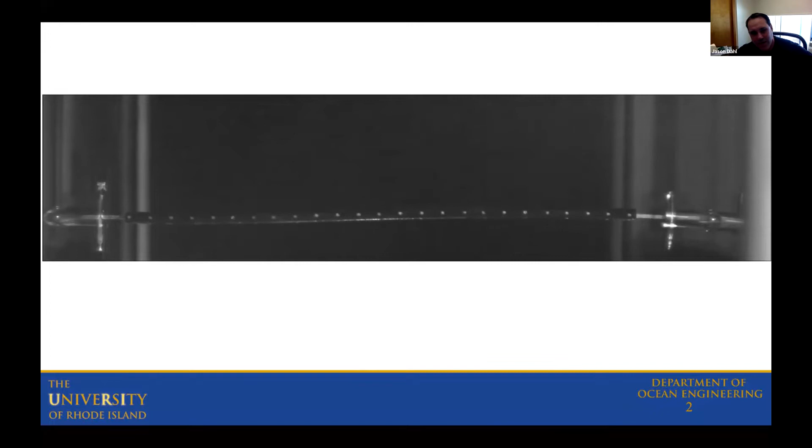All right, I'm assuming that the group here working in renewable energy systems or energy systems in general may or may not be familiar with the topic of vortex-induced vibrations. It's not necessarily specific to renewable energy systems, but it is related in some way, and it's important to structures that operate in the ocean. So just to give you an idea of what vortex-induced vibrations are: if you have fluid flowing across a bluff-shaped body that's flexible in nature, the vortex shedding behind that body can cause it to vibrate. This is an example of a flexible cylinder encountering a fluid flow. The fluid flow is flowing out of the screen towards your face, which is causing this cylinder to vibrate due to that fluid structure interaction.

Now this is an issue in a lot of ocean systems. In offshore structures, such as the spar buoy platform over on the right here, this thing itself is a large cylinder that floats in the ocean. So if it encounters currents, the whole structure itself may vibrate due to the presence of those currents. It also has mooring lines, which can strum due to the presence of those currents. It also has drilling risers, which can vibrate due to currents, causing problems with the operation of offshore structures like this.

It's also an issue for energy systems in the ocean. Floating offshore wind has mooring systems, has cylindrical shapes if they're floating structures, so a spar-type floating offshore wind system may be susceptible to these types of vibrations. Electrical cables, underwater electrical cables, could encounter these types of things. Towed systems, also towed arrays, can also undergo strumming that can cause a problem with imaging underwater. And then in the upper left here, this is actually a picture of a device called Vivace, developed at the University of Michigan, which tries to utilize the vibrations caused by vortex-induced vibrations for energy harvesting purposes. They have an array of 4 cylinders here that vibrate when this device is placed in a current.

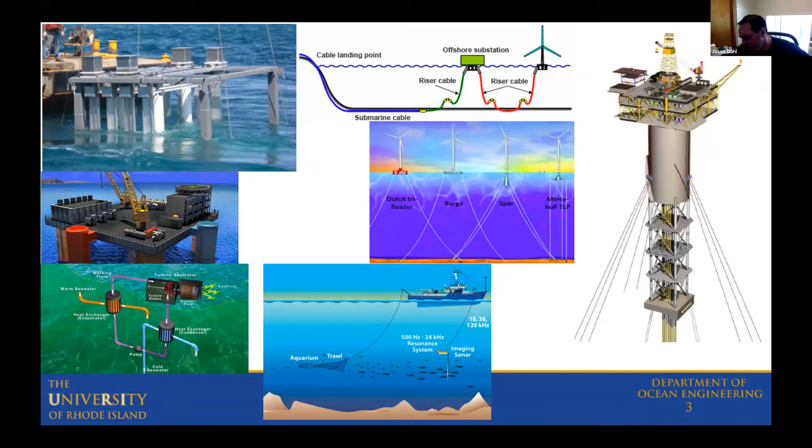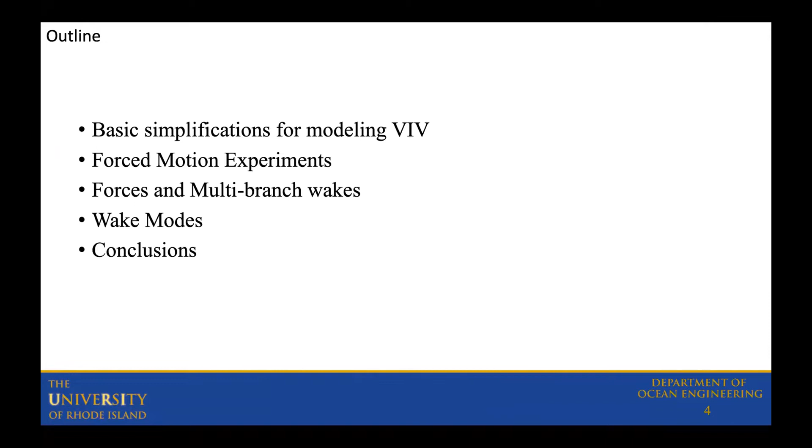So today, although there's a variety of these applications relevant to this topic, I'm going to talk about things at a much more fundamental level and not so much in terms of the applications. Just to give an outline of what I want to talk about: I'm going to talk about some basic simplifications for modeling vortex-induced vibrations, how we simplify these more complex applied problems into something more canonical. I'll talk about forced motions experiments, which is one way we use for understanding the forces that act on the structure under these types of flow conditions. And then some of the observations from these forced motions experiments, which include looking at the forces, which can involve some very nonlinear behaviors, such as multiple branches or multiple wakes for a given set of kinematic conditions, and looking at wake modes.

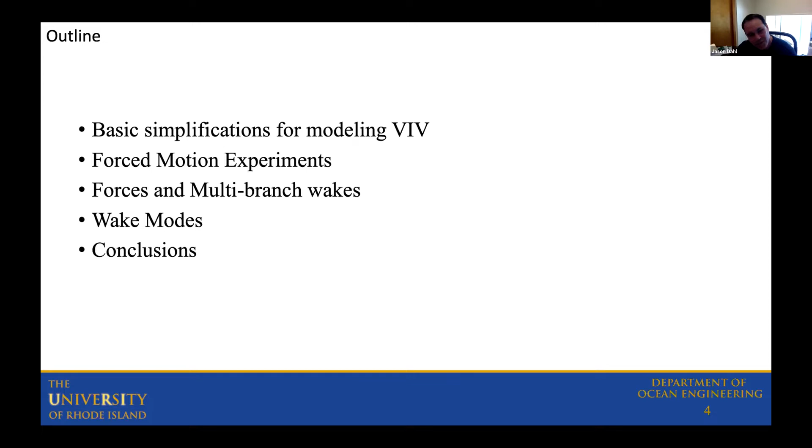So looking at some flow visualization of what's actually happening in the fluid when these structures vibrate.

To give a basic understanding of this problem, if we've got some floating structure here, which might be this green box, and then some long flexible structure stretching to the bottom, this could be a drilling riser, a mooring line, or whatever.

These types of structures in the ocean might encounter a sheared current, which could be a uniform current or a current that changes with depth. But locally, what's happening is if we look at a cross section of this structure, we can think of it as though we've got some cylinder here.

That cylinder is flexible in some way. If we're just looking at a cross section of the structure, we might think of it as just a cylinder with a spring attached, or a spring-damper combination. As fluid flows across that cylinder, we get vortices that shed in the wake of the structure, and the phasing, proximity, and strength of those vortices can force this structure to move side to side, which causes it to vibrate.

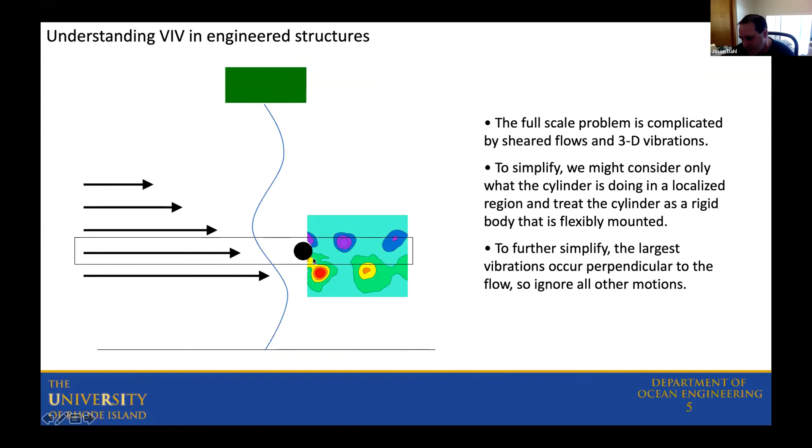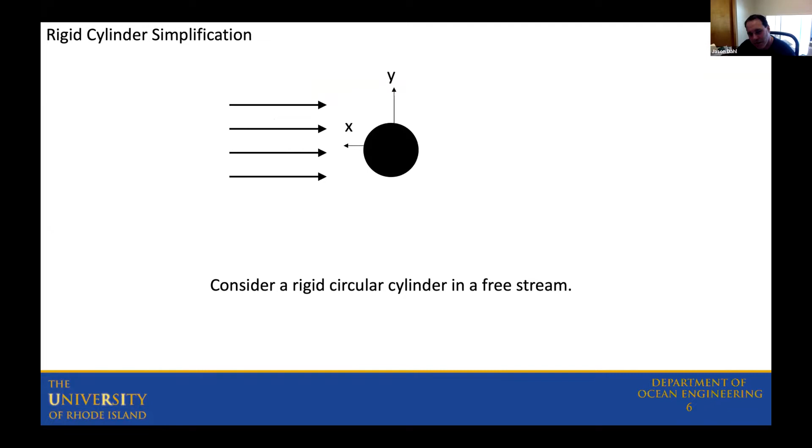Now, if we want to think about the simplified problem, we consider just a uniform incoming current flowing across the cylinder. As the fluid flows across it, you get these vortices shedding in the wake. The proximity and motion of those vortices to the cylinder cause a force to act on it. One way to think of this is that these vortices are little low pressure regions in the wake of the body, so the body gets pulled towards them.

Now, when you have vortices shed in the wake of this cylinder, the typical shedding pattern may be to have one shedding to one side and an opposite rotating vortex shedding to the other side. As this happens, the vortex on top will pull the cylinder upward, and the vortex on the bottom will force it downward. So you get a frequency associated with the forcing of shedding.

The frequency acting in the y direction occurs at the same frequency at which a single vortex sheds. But if you think about the drag direction, the force acting in the x direction, it happens at twice that frequency, because the vortices are always shedding downstream to the same side of the cylinder. So you typically end up with a 2-to-1 frequency ratio in this type of vortex shedding.

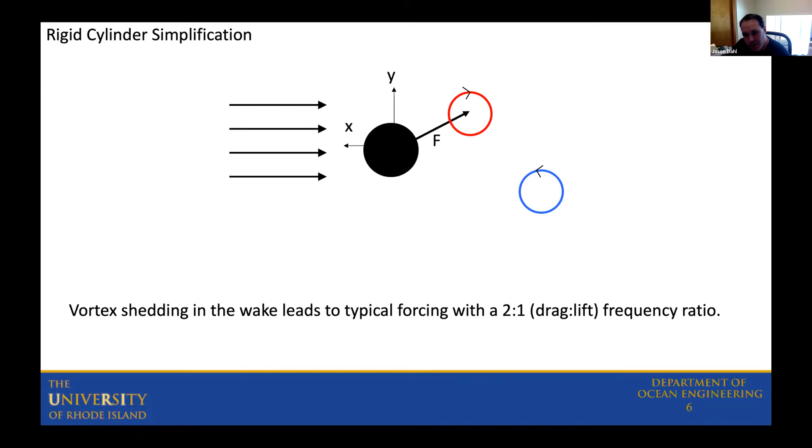That becomes important when we start looking at what can happen on these types of structures in more complex situations. And then when we consider what's happening with this structure, we need it to be flexibly mounted in order for it to move.

If we just consider this 2D structure mounted on springs, the simplest case we might consider is that the structure is only allowed to move in the y direction. That's an assumption commonly made in offshore structures, and the reason is that most of the vibrations observed for these types of structures occur in the y direction, called the cross flow direction, or perpendicular to the flow. Vibrations in the x direction end up being much smaller.

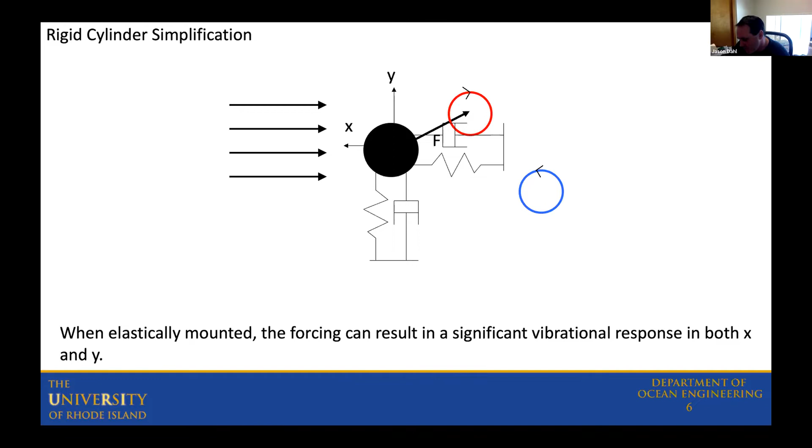But that type of simplification can cause a problem. Let's first look at the simplest condition though. If we consider only motion of our structure in the y direction, one common assumption is to assume only sinusoidal motions and forces. Now this is a big assumption, and it's not actually true. If you observe the vibrations of a structure undergoing this type of excitation, it doesn't just vibrate with sinusoidal type motions, and it certainly doesn't just have sinusoidal forces. But this is a simplification made to help understand the problem a little more.

So if we do that, we can define an equation of motion. For our simplified case, it looks like a simple spring mass dashpot system with a mass in the y direction, a damping in the y direction, and a spring constant for the y direction. The fluid force is all on the right-hand side of the equation, representing the forcing caused by the presence and shedding of those vortices.

If we assume sinusoidal motion, we can assume a form of the response. So the response has some amplitude and frequency. We can derive the derivatives then from that response.

If we also assume that the forcing is a sinusoidal response, we said that this is not entirely true. This is actually like a first order approximation of the force, if we treated the force as though it were a Fourier series. Then we can say that the force is of the form of some magnitude occurring at the same frequency with some phase shift.

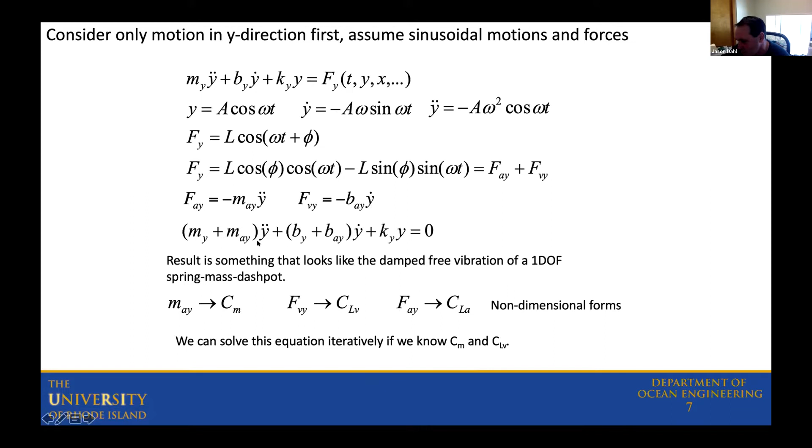So how do we determine those? Well, there's a variety of ways that people approach for determining these.

You might use a fluid model similar looking to the Morison equation, for example. There's a lot of work that's been done on what are called wake oscillators for trying to model this. But those approaches are somewhat flawed in the fact that they don't perfectly capture what's happening in the fluid when it's responding to what the structural system is doing.

So one approach to solving or representing the fluid force is to conduct forced motion experiments. In this case, what we do is we take our cylinder and we force it with a prescribed motion, such as a sinusoidal motion, y equals a cosine omega t. Then we say that the output force, again, we'll assume that it's of the form of some sinusoid with the same frequency and a phase shift.

So then if we go through prescribing a bunch of motions, doing a number of experiments where we force this cylinder to oscillate with a varying amplitude or varying frequency, then we can come up with basically a database or a lookup table of forces that we can use as an input to solving our equation of motion.

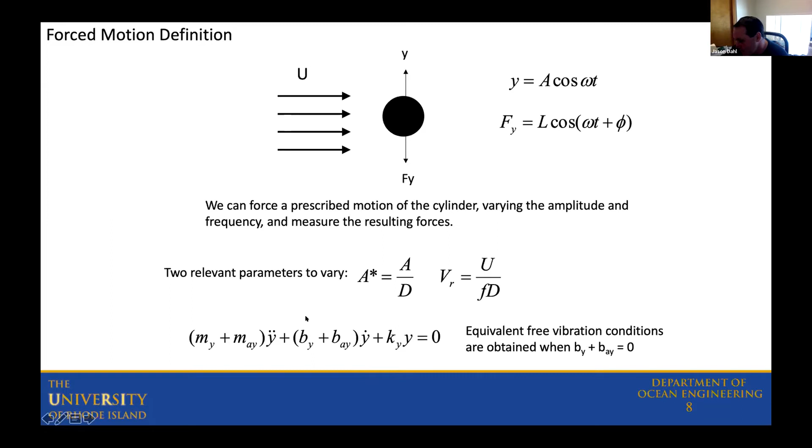Basically you can think of this as a system that's going to oscillate at its effective natural frequency. In this case, the effective natural frequency would just be the square root of ky over m plus ma. It's not really a free vibration, it's actually a forced vibration system because it's being excited by the fluid, but it behaves like a freely vibrating system with a natural frequency.

Now, in the forced motion work, there's been a number of studies done to develop fluid force models for these types of systems. One of the most expansive databases was done by Morse and Williamson, reported in a Journal of Fluid Mechanics paper from 2009, where they did cross-flow only motion experiments where they varied the non-dimensional amplitude and the non-dimensional frequency.

Non-dimensional frequency is represented by this term VR, which is called the reduced velocity. They did a very fine experimental resolution set, so they took these parameters and varied them by very small amounts. They ended up doing a total of 5,680 experiments.

They conducted these experiments by taking their cylinder and putting it in a recirculating flow channel, then they would oscillate the cylinder with these different amplitudes and frequencies, run an experiment for maybe a minute or so, collect data, then vary the parameter and do that again. It took a long time to run this many experiments, but they ended up with a really fine mapping of how these fluid forces change as a function of these parameters.

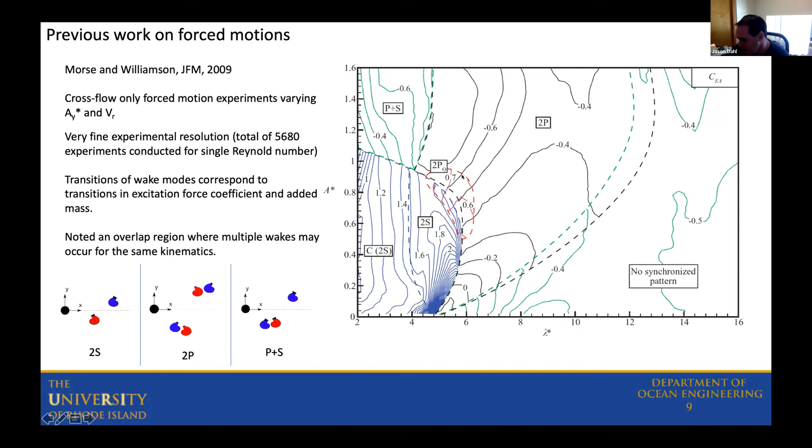Now, one of the problems with making these simplifications of only looking at cross-flow motion is that on real structures, they move with three-dimensional vibrations. They move all over the place.

If you want to look at a cross-section of one of these structures, it's really more accurate to consider that the cross-section can move in both the X and Y direction, which is how I introduced the problem originally. When that happens, if we look at what the structure is doing in that cross-sectional plane, you can get all of these interesting types of motions because of that 2-to-1 ratio between inline and cross-flow forcing that we said is a natural aspect of vortex shedding.

You end up with the structure being excited with these figure-8 type motions. And when you have these figure-8 type motions, it changes the relative motion of the body relative to those vortices being shed in the wake, which then affects how the forces act on the structure. It completely changes the forcing on the structure.

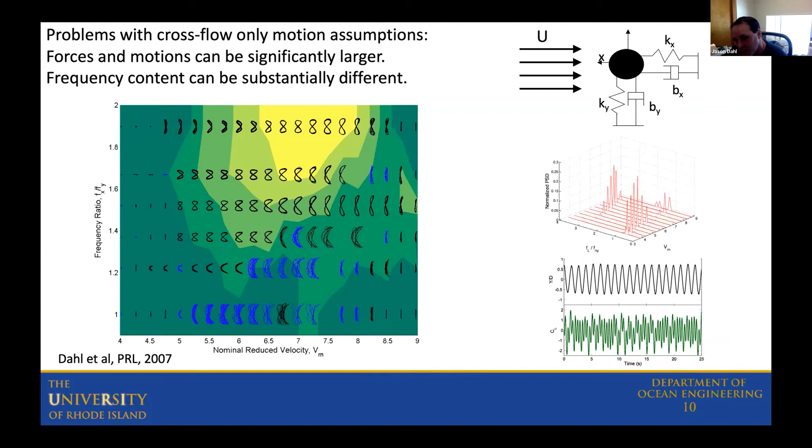This is actually important because higher frequency forcing can really affect fatigue life of things that are undergoing these types of vibrations. So if it's important to consider that our structure can move with both cross flow and inline motion, then we have a different set of equations.

So then we might introduce a second equation to describe motion in the x direction. In our simplified system of just a cylinder with spring masses, our equations might look something like this, where again, Fy and Fx are now the oscillatory or fluctuating fluid forces in both the x and y directions. Again, if we want to solve this system of equations and predict how a structure might move under certain incoming flow conditions, what we need is some sort of model to determine what these fluid forces are.

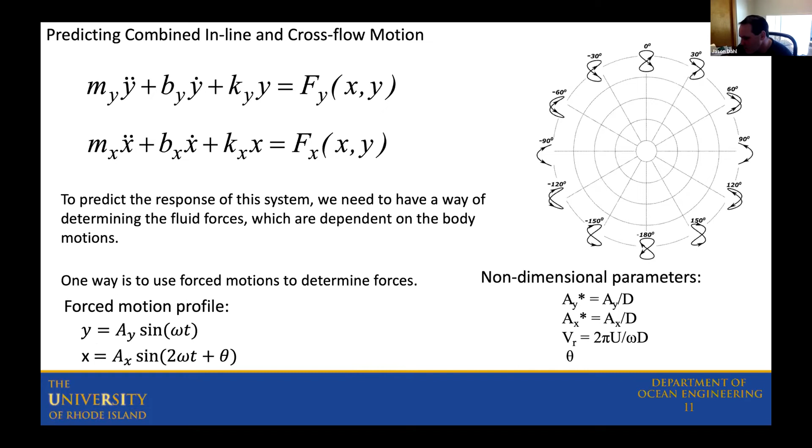All right, so if we want to run a set of forced motion experiments, we need to vary all of these parameters.

One problem is that in comparison with, for instance, Morse and Williamson, which we showed earlier, they were only forcing the body to move perpendicular to the flow direction, so they only had 2 parameters. They ran thousands of runs over these 2 parameters, which gave them a really high resolution of experiments.

If I want to achieve the same resolution of experiments, take the square root of 5,680, that gives you a rough parameter resolution of about 75. If I want the same resolution but now I have 4 parameters that I'm varying, that means I need to run about 32 million experiments, which is not going to happen. So we definitely cannot run that. It would take years and years to do something like that.

There have been other, less resolved forced motion studies. For instance, Gopalkrishnan in 1994 did a set of about 300 runs. But still, even in that case, the equivalent number of runs I would have to do if I increase my parameters to 4 is over 90,000 runs. So it becomes difficult to get a really high resolution measurement of the force in this way.

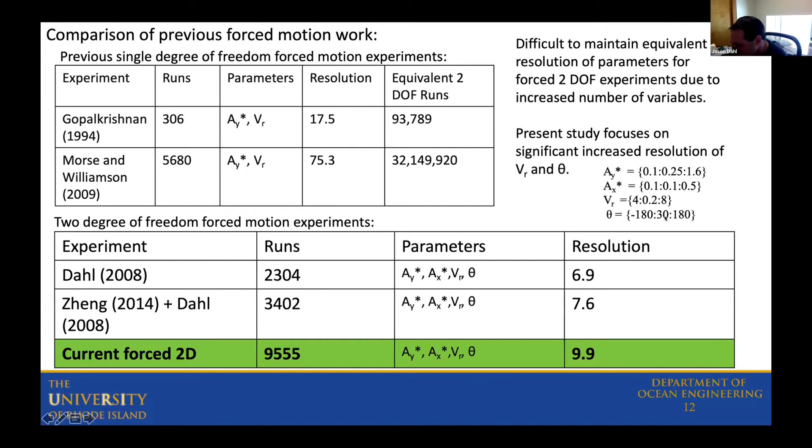The way we conduct these experiments, we have a small towing tank that has a carriage. It's a completely motorized robotic system. Our carriage is mounted to a motor that drives the carriage forward with some speed u. On the carriage, we have an XY motion system that can force the test cylinder to move with prescribed motions in the X and Y directions. As we tow the cylinder down the length of the tank, we force it to move with this oscillatory motion in both X and Y. We have the cylinder mounted to a 6-axis force sensor, so we measure forces as we do this.

We also do flow visualization. For a subset, about 1,000 of the 10,000 experiments that we run, we do flow visualization using a particle image velocimetry system to measure what the fluid is doing, to make a quantitative measurement of the fluid velocity field. For those not familiar with particle image velocimetry, it works by shining a laser sheet through the fluid, and we seed the fluid with particles. The laser sheet illuminates those particles, and we take pictures of them over time with a camera, which allows us to calculate what the velocity field looks like.

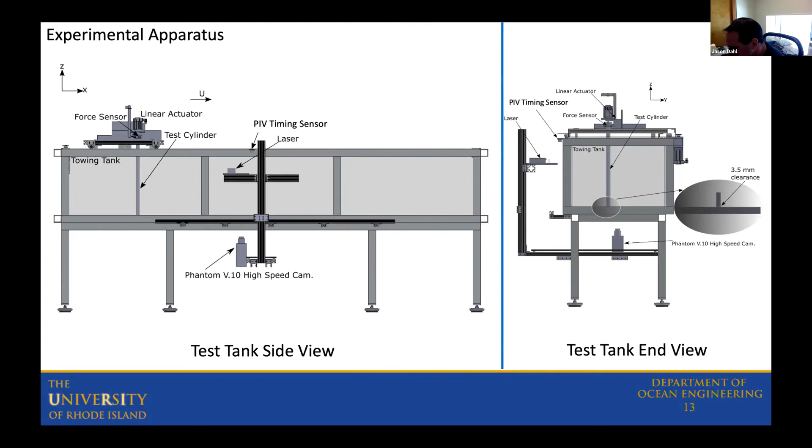It can be a little confusing to present this data, because we're varying 4 variables, and we also want to plot whatever our output measurement is. To do this, I'll show a number of these plots using polar plots to help show what's going on. This polar plot shows variation of the phase theta around the polar plot, so that's the angles that are shown here.

Variation of the reduced velocity is shown across the radius of each of these plots. It starts with 4 at the center, moving out to 8. Whatever we're plotting, so if I want to plot a lift coefficient, for example, that's shown as the contours or the colors in the plot.

I can plot a separate polar plot for fixed values of the inline and cross flow amplitudes. So then I have to make multiple of these plots to show how a particular parameter varies throughout the entire database.

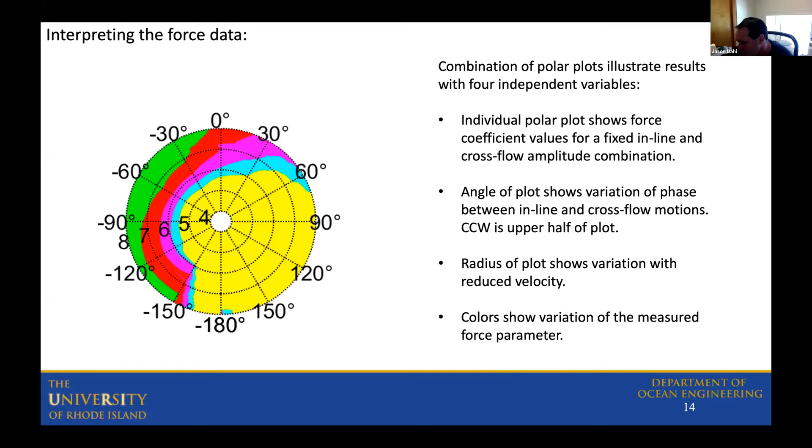For example, if I want to show power coefficient and excitation, the power coefficient is defined up in the top right here. It's basically the inner product of the forces acting on the cylinder in phase with the velocity, normalized by the fluid power.

This is important because it shows where natural excitation of the structure would occur, or where energy transfer from the fluid to the structure, or from the structure to the fluid, would occur. Where this parameter is positive is where there's excitation from the fluid to the structure, which would cause vibrations to happen. Where this parameter is negative is where the structure is forcing the fluid, which would cause damping to the vibration of the structure.

We can illustrate the entire database here and show where it's negative, shown in gray, and where it's positive, shown in white. Every white region here is where we would expect free vibration of a structure to occur, of just a cylinder mounted on springs.

The kinematic conditions for that happening correspond to those shown in the plot here. This matrix of plots shows combinations of Y amplitude on the vertical axis, X amplitude on the horizontal axis, and then the specific values of the reduced velocity and the phase between motions within the polar plot. We can see there's a variety of kinematic conditions where excitation might occur, where this white region is.

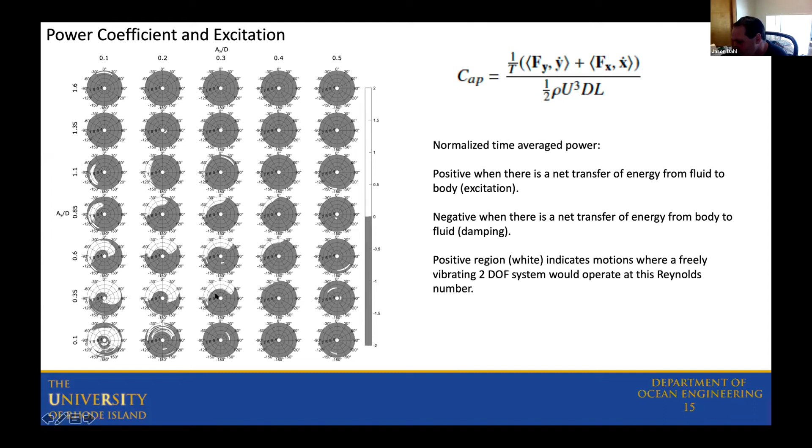Now we can also look at individual fluid forces. It's complicated, and it's not particularly important to look at the specific values, but you can see from these plots there's a pretty wide range to the excitation force CLV, between -5 and 2.5 here. And the force in phase with velocity has a pretty large range as well.

But one thing we did notice when looking at these plots is there's a couple of interesting regions where some weird stuff is happening. If we look at these two particular cases here, for some of the phases there seems to be some jumping around in the fluid force, and it's a little bit hard to see with the full plot here.

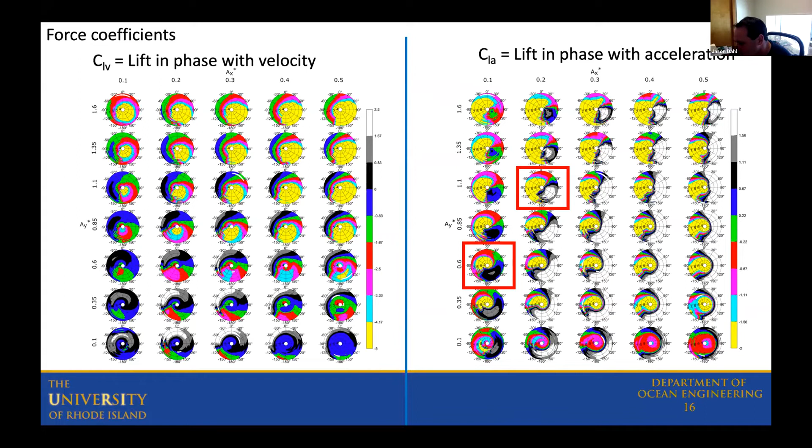So if we zoom in on one of these polar plots, we can see that for a phase near between -120 and -150, there are these kind of spikes in the force here where it's spiking back and forth.

If we take a look at the plot where I plot along the ray of each of these polar plots, we're basically plotting the lift in phase with acceleration as a function of reduced velocity for all different phases. Normally you follow a fairly smooth looking curve where there's a nice transition of this force coefficient as a function of frequency.

However, there's a couple of these phases where we see the force coefficient kind of jump around, and it looks like it's actually jumping between multiple values here. It's interesting what exactly is going on here.

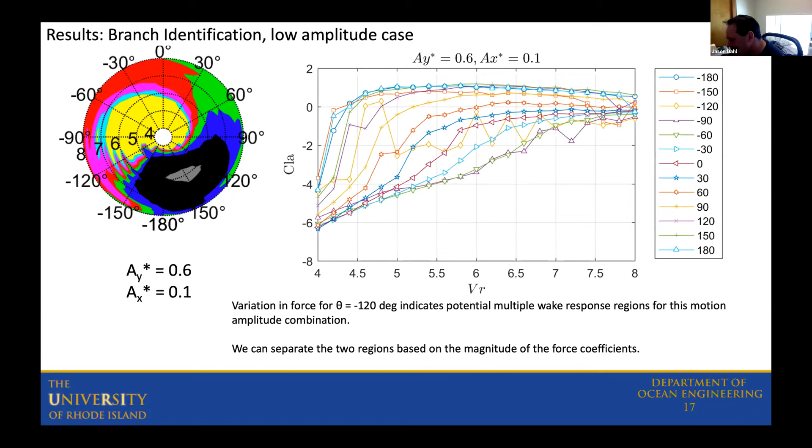If we take a closer look at those values and separate the values occurring over the high measured values from the values occurring over the low values, what's actually happening here is we're observing two separate branches to the fluid force.

If we take another look at this polar plot and separate the upper branch from the lower branch, you can see there's actually an overlapping region where you have a particular fluid force associated with some aspect of the wake of the system. And for the exact same kinematic motions, you can have a different response of the system, or a different wake.

This is exactly the type of thing that was happening in the Morse and Williamson case that I showed earlier. So in order to really see what's happening here, you have to look at the wake itself.

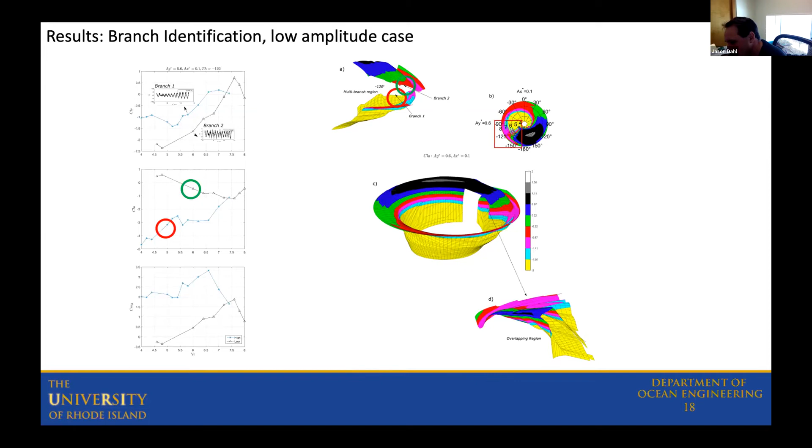We'll take a look at these two particular points along these different branches. If we look at branch 1, the lower branch shown in the polar plot in the lower left here, and look at what's happening in the wake for that kinematic condition, we see multiple vortices shedding in the wake.

You get 2 like-signed vortices that shed together and spin up together in the wake, and then 2 opposite-signed vortices that shed together and spin together. This type of wake is called a 2C wake, standing for 2 co-rotating pairs of vortices. It's actually similar to the 2S wake, where you have 2 single vortices shed, because if these vortices were to coalesce, you'd just have a single blue vortex or a single orange vortex shedding from the body.

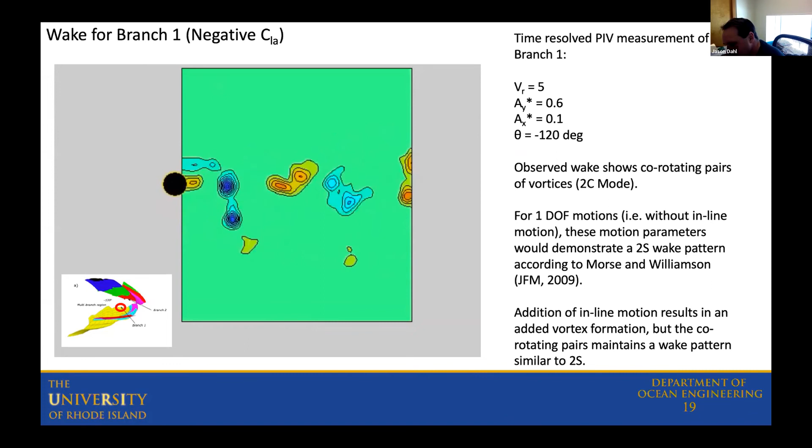This is interesting in itself, but if we look at the other branch, which has very similar, almost exactly the same kinematic conditions to the lower branch, we now have what's called a 2P wake, where pairs of opposite-signed vortices shed per cycle.

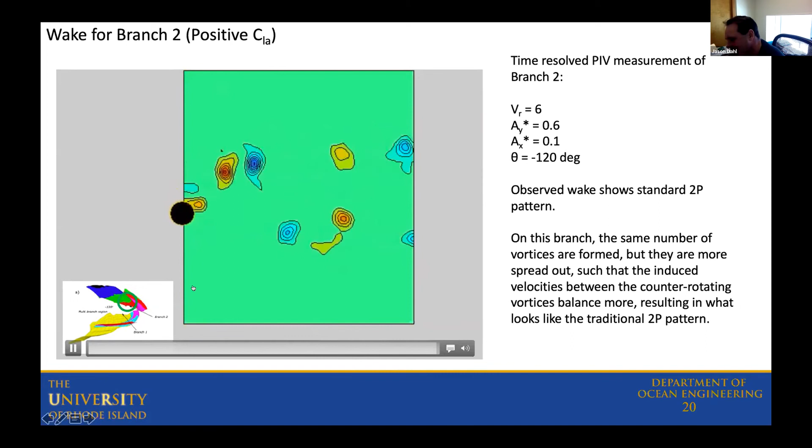It's actually a bit different from the other wake, but if you look closely it's a little related to what we had before, except the like-signed vortices are spread further apart from one another. Because of that, the relative motion of the body with respect to the vortices shedding in the wake is very different, leading to different forcing, different forces, and different phasing between the forces, which is why these responses end up on different branches when viewed in the context of the force acting on the body.

All right. So all of those wakes were for the case of minus 120 degrees here.

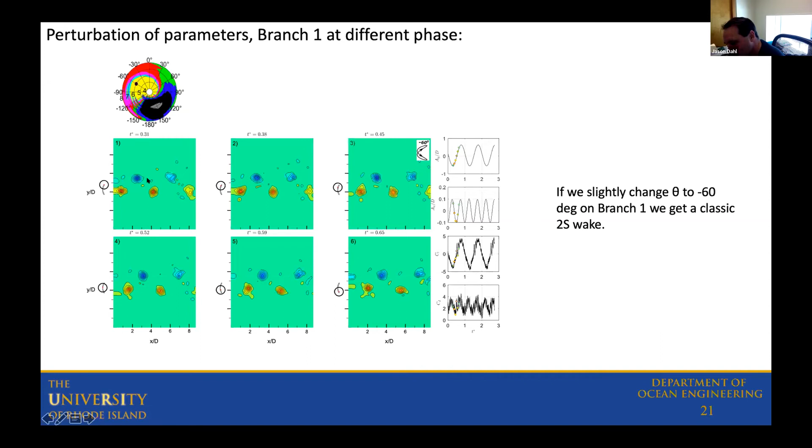If we move along the plot a little, towards minus 60 degrees, we see the wake transitions to what's called a 2S wake, the classic Kármán vortex street, with alternating shedding vortices in the wake. This shows there's a smooth transition of the wake associated with the orbital motion, or orbital shape, of the body as it undergoes these vibrations.

Similarly, if I move the other direction, to minus 180 degrees, keeping all other kinematic parameters the same, you end up with a wake that's verging on a P plus S wake. Here you have 2 blue vortices shedding in the wake of the body, 1 strong orange vortex shedding in the wake, and also a very weak orange vortex structure shedding in the wake.

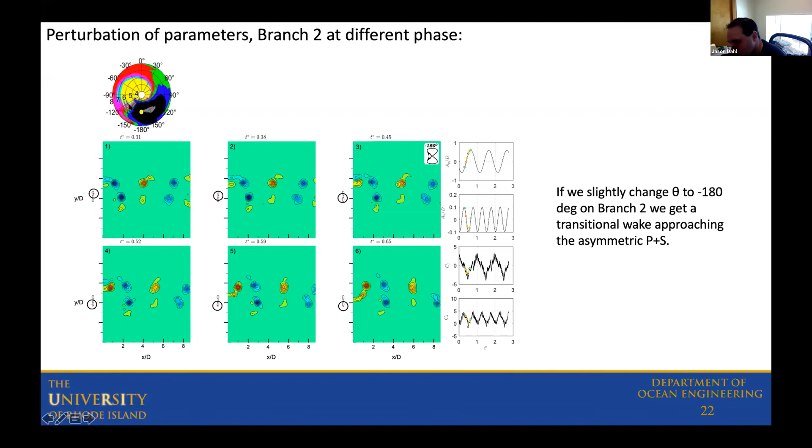This is kind of a transition from what we saw before, which was the 2P pattern where all the vortices were roughly the same magnitude. It's transitioning so that one of these becomes a lot weaker. So again, we see a smooth transition as we move away from that particular kinematic condition.

If we look at the other case, with slightly higher amplitude motions of the body, again we have this multi-branch region we can separate apart. If we plot the polar plot and look at it in 3D, we can again see where these overlapping branches occur.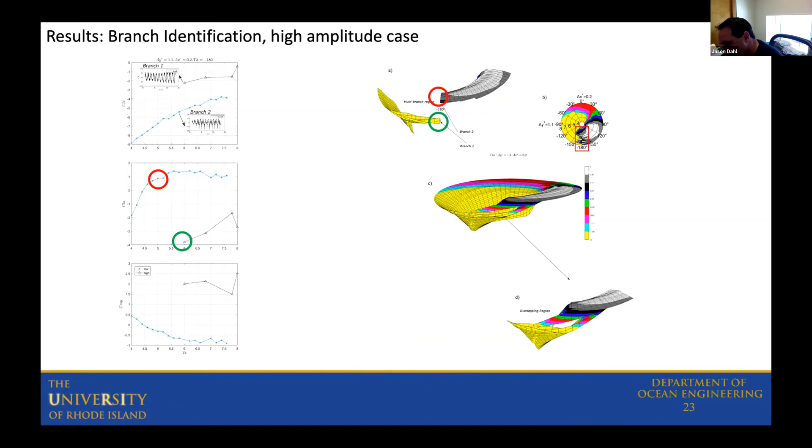If we again look at the wake for these two conditions, on two different branches: on the lower branch, where we have a negative lift in phase with acceleration, we get a really messy looking wake. There's a lot going on here, incredibly messy, not well organized. A lot of vorticity is being shed, and it kind of blobs up and then maybe separates apart.

So you sometimes have pairs almost forming. Because of this messy wake, it causes a lot of asymmetry to the wake, and you end up with a mean lift force acting on the body for motions like this.

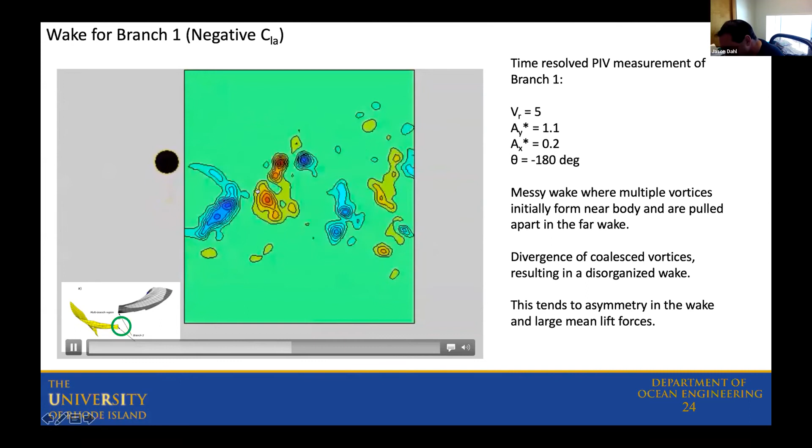If I switch to the upper branch response, we're looking at the same kinematic conditions, but on the upper branch case, we see a more well-formed wake with regular vortical structures forming. It's almost what you'd call a 2T wake, because you end up with a triplet of vortices that shed each time: one weak orange vortex and two strong blues, then two strong orange with one weak blue.

Again, this is interesting where the reformation of the wake results in this change in the phasing of forcing, and this dramatic change in forces acting on the body.

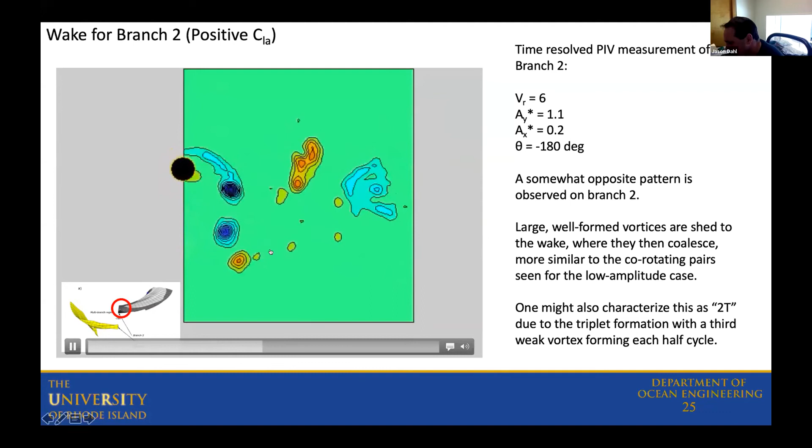All right, and if we go through the entire database and ask where is this happening, all of these shaded regions on this entire map are regions where we observe this to happen.

One thing important to note is we're conducting towing tank experiments here, and it's really hard to observe something like this in a towing tank experiment, because usually there's some sort of bias to your experiment. What that'll do is bias your system to always show you the same response or the same wake, so this is a testament to the nice way this experiment was conducted.

Because we made it completely robotic, we were able to repeat the experiment with the exact same conditions every time. Because there's no preference to the fluid on which of these wakes are going to form, it would naturally just switch between them. So as we conducted a new experiment, it was completely random whether it would show one response or one of the wake branches or one of the others.

Also, because we were running so many experiments, the only ones we repeated were for phases of minus 180 degrees. We actually ran them twice, but none of the other experiments were repeated. But we did find that where these branch responses occurred for minus 180 degrees, such as in this case, we repeatedly produced these results where some of the time we'd observe one type of wake and some of the time a different type of wake.

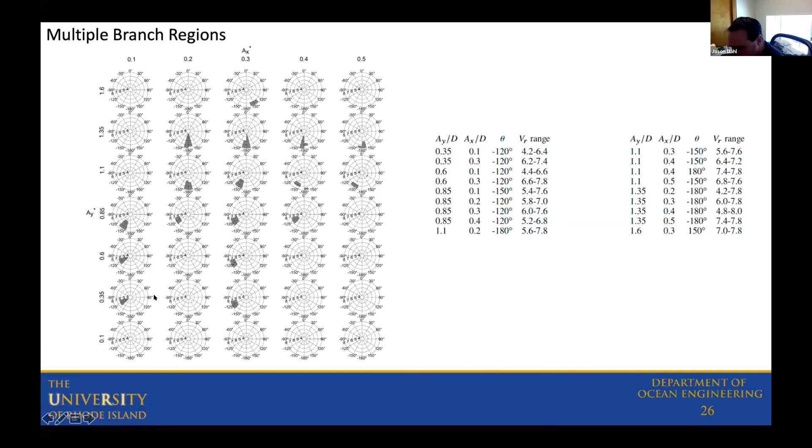So the interesting takeaway here is that this type of very nonlinear response is all over the place when you include this inline motion to the response of the system.

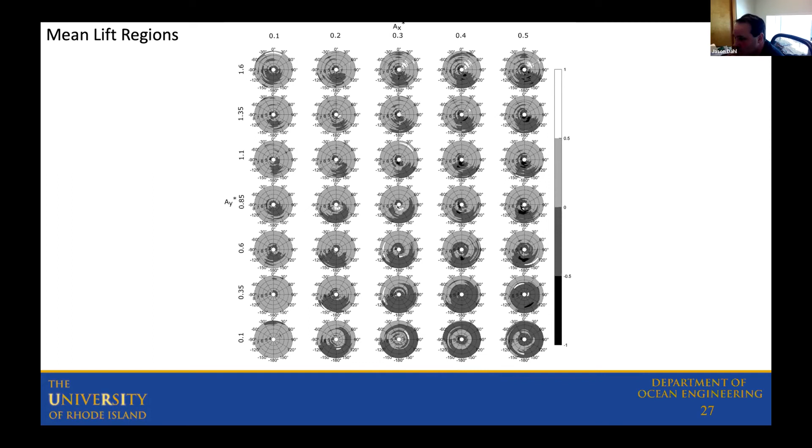Another aspect of this is because of these multiple wakes and messy types of wakes, you can have some pretty strong mean lift regions. Mean lift can cause problems on offshore structures because you can get conditions called kiting, where the structure biases to one side due to the mean lift acting on it. Mean lift can also, since it's a result of asymmetry, cause or result in unstable vibrations such as galloping.

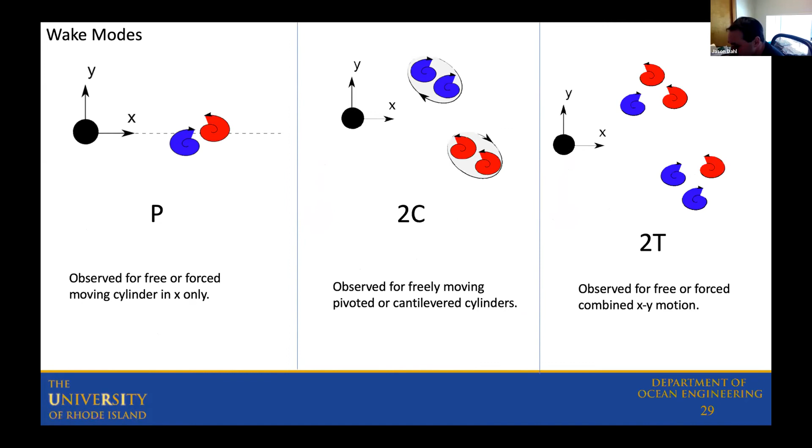The interesting thing we see is if we go through the entire database, we get all of these different modes and more. So it's really complicated, really complex what's going on in the wake of this structure, even with these minor and small variations to the kinematics of the structure. This illustration maps out how there's so much variability in what's happening in the wake with these different types of wake modes occurring.

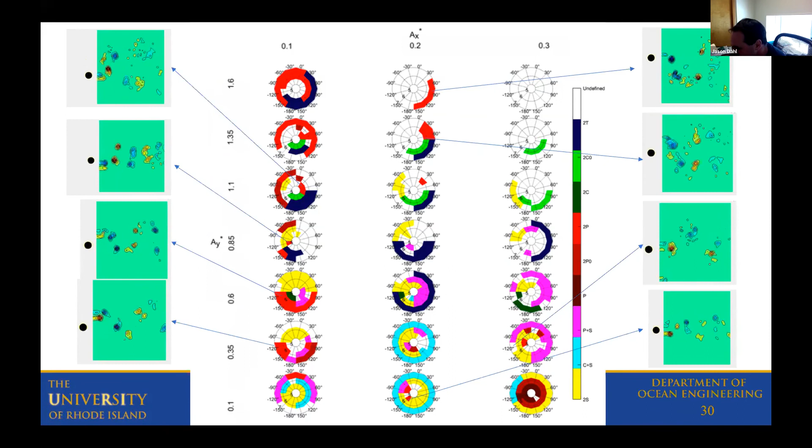So just to try to illustrate the variability of the problem. To conclude, I know I've thrown a lot of information at you guys, but ultimately the reason for doing this is the basis for developing new force models that could be used for predicting these types of motions. And if we want to go into applications where we want to predict motions of these types of fluid structure interactions, it's important to have these types of models available.

In the case of force database or force measurements, it's important to have sufficient resolution when studying a problem like this, because some important dynamics may be lost. Previously I had done forced motion experiments with much coarser measurement, and we didn't observe any of these multiple branch regions in the force measurements. The reason was we didn't have enough resolution of the reduced velocity in the phase to observe them.

In observing these branches, this is pretty interesting. Although it's been observed in the past for cross-flow motion only, or 1 degree of freedom systems, the fact that it's so widespread when you introduce inline motion to the structure aids in seeing the complexity of this particular problem. It can actually pose a problem if we want to develop simple force models because of that non-uniqueness.

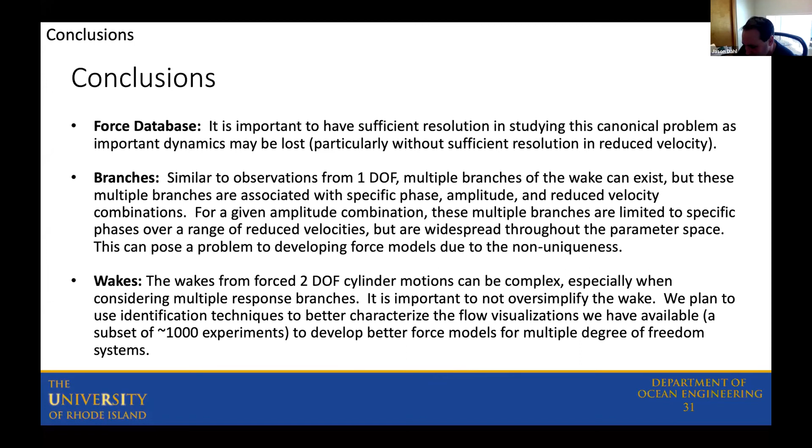So that concludes my presentation, and I hope that you guys hung in there and understood what was going on. I hope maybe this was a break from what you maybe usually see. I'd be happy to answer questions if you have any, or if there's time remaining.

Hi, Jason. This is Pedro Monaco.

I put a couple of questions for you in the chat. Oh okay, I know the answer is not like 3 minutes or so, whatever we have remained. But it's just very interesting. Thank you for your presentation. Maybe we have the opportunity to talk more in detail about your work. It's really fascinating, I think. Oh, sure.

So you're asking, how accurate is the assumption of moving the cylinder in stagnant water instead of an underlying current in a fixed cylinder?

Because we're measuring hydrodynamic forces, the case of moving it when it's in still water and towing it through the fluid is actually a more pure measurement because we don't have any underlying turbulence in the background. The other case is like Williamson and Morse and Williamson, conducting it in a recirculating flow channel, where you have some inherent turbulence background, which can also contribute to biasing what happens in the wake. That could force the system to bias itself to reform the wake in a particular form. Whereas with still fluid, in this case, we're not biasing the system at all.